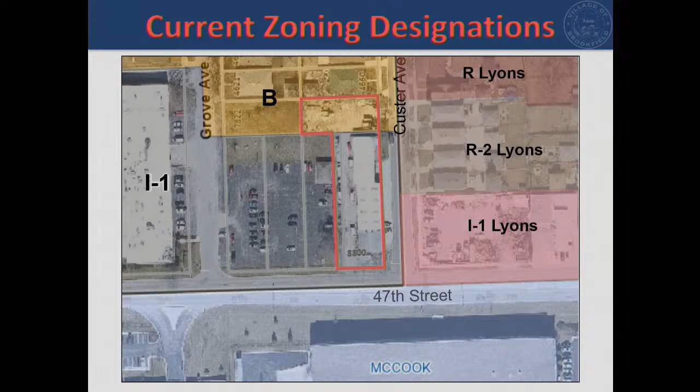So on February 23rd, the majority of the commissioners determined that the map amendment request met the standards for this type of request and issued a 4-2 vote in favor of recommending the request. Likewise, at that same public hearing, the majority of the Planning and Zoning Commission determined that the special use request met the standards of review for this type of request and voted 5-1 in favor of recommending, with the conditions shown here. That concludes my report.

Thank you, Kate. Do the board members have any questions or comments related to this application? Kate, can you talk a little bit about, I understand the B to the I1, but for the outdoor storage, if we approve that, and this is sold to another like business, I understand that. What if it's sold to something different, a different use? Wouldn't you have to get the approval for outdoor storage for that particular use?

So that is an option to approach it that way, because outdoor storage is an accessory use, it is not the primary use, such as the plumbing business. I believe that the special use permit could be issued related to the property, or it could be issued in such a way that it would not authorize a different type of use. So if we approve the outdoor storage, that's outdoor storage on that particular PIN number, whatever the use is.

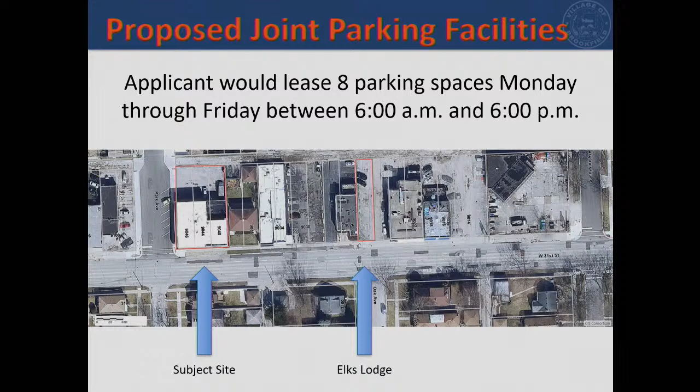On February 23rd, the Planning and Zoning Commission deliberated, asked questions, and considered the standards of review for both special use permits and variances. They did not move to recommend approval of any of the 3 requests. I will mention that the petitioner is here this evening and does wish to make a presentation as well.

Sure, I'll leave it up to the board. Do you want to hear the presentation first and then open it up to questions from the board? Okay, sure. So if the applicant would like to please come up to the microphone and give us your name for the record, and then you may address the board.

Hello, my name is Pavel Chalderna. Thank you very much for allowing me to present this presentation. We are proposing a daycare. The proposed parking configuration, designed by a licensed architect, provides 7 parking spaces, including 1 ADA space. A traffic study has been done, and it shows less than 1% increase in traffic caused by an operation of this size. The parking lot includes a dedicated drop-off and pickup area to ensure safety for kids.

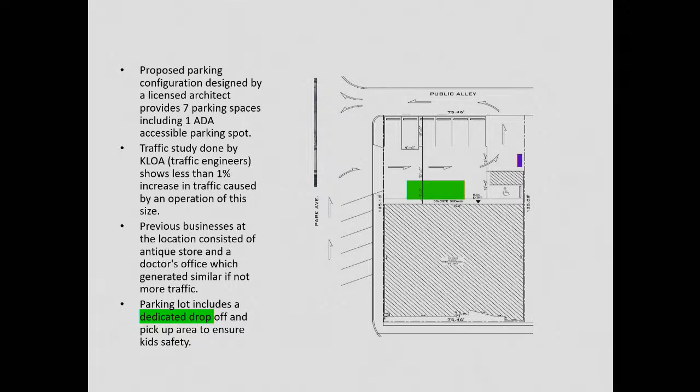The site has been visited by DCFS twice now. Both licensing representatives, Ms. Jasmine and Ms. Shantil Sanders, determined that the location is suitable for daycare and meets all of their necessary requirements. Ms. Sanders, who we've been working with, evaluated nearby Candy Cane Park and also found it suitable and within walking distance from the site. She gave us an idea, and we are planning, if we get approved, to have an indoor playground for the kids.

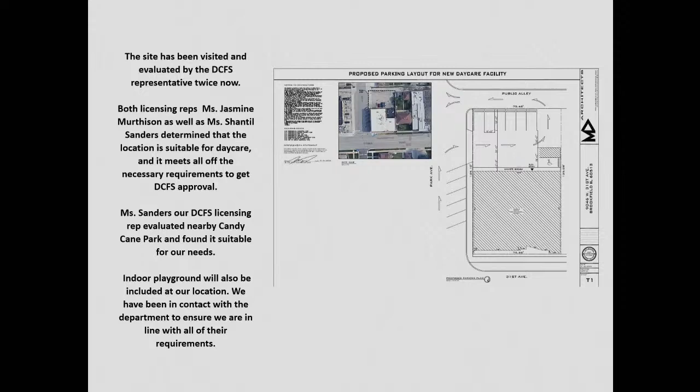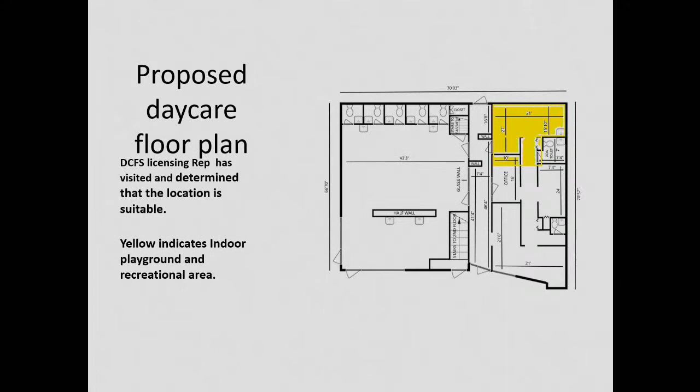Once again, the DCFS determined the location is suitable, and the highlighted yellow spot shows where the indoor playground will be.

The previous concerns were mainly raised about public parking spaces next to the building. Those parking spaces have nothing to do with our application, and we've gone over and over on traffic—we did a traffic study, and it does not show an issue. It shows that the traffic will be less than a 1% increase. Before we decided to open a daycare, we consulted with an architect and traffic engineers. We ourselves also have experience with a daycare. We spent endless hours researching, and we know there's a need for a quality daycare in the area, and we do want to provide one.

We went above and beyond to make everyone happy, and found a resolution to basically every problem that was brought our way. We are willing to reduce the number of kids if that's necessary. Thank you very much.

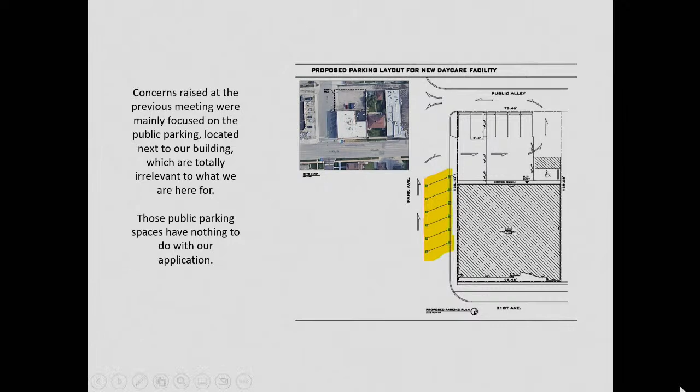Does the board have any questions for the applicant at this time? I just thought I'd keep you up here in case they have questions. We'll have questions for staff, or you can direct questions to staff as well.

One question at this point: what is the plan for the alley? If it's one-way westbound, is it all going that way, or is this actually going against the traffic of the alley? The traffic is shown on that diagram to go westbound. Okay, and that's the way the whole alley is? No. Right, that's what I'm asking. So at this time, there's no code reference that staff was able to locate indicating that the direction of that alley goes in two directions, although that did come up at the public hearing.

But right now, it is an eastbound alley. There is signage of both sorts posted at that alley. It's hard for me to say when that occurred. Okay, but right now, if we were to drive out there, we would assume it is an eastbound alley, correct? At a portion of it, in the middle, yes. And this part being proposed would actually go counter to that.

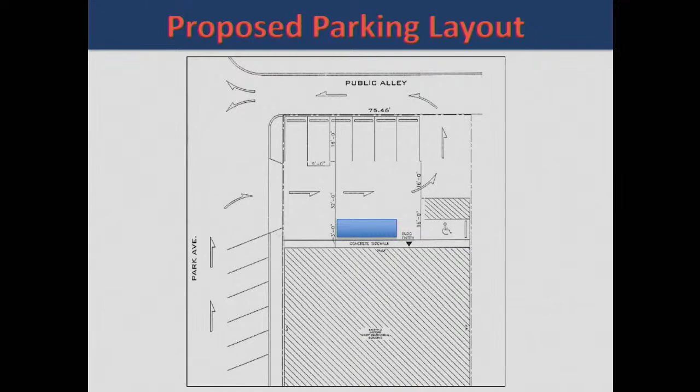President Garvey, in the memo it says 13 are required for the daycare, so it's the residents upstairs plus the daycare amount, totaling 13. And once again, we are willing to reduce the number of kids to actually need even less parking. Okay, I was just trying to clarify the application and the request for my own thoughts.

Other questions or comments from the board? Are we allowed to put a condition on this that might specify who parks where? That this is resident parking behind the building and employee parking at the Elks Lodge? That is an opportunity of a special use permit, yes.

Thank you. I'd ask the village attorney to weigh in, because if the tenants upstairs aren't impacted by this application, and depending on what their leases say for these spots, I don't think this use could have an impact on a lease that a residential person would have over those parking spots. Correct me if I'm wrong, Tom. No, you characterized it correctly. I'm not familiar with where the residential spots are with this property, but the special use would not impact the residential use. This zoning action could not impact an existing legal lease those tenants may have. I have no idea what those leases say about these parking spaces.

It wouldn't necessarily impact the lease, but could we specify as a condition that the parking at the Elks Lodge and the shared parking is for employees and for the daycare? That would be between the lease or agreement the Elks Lodge would have with the applicant or the business. But if it's a condition of the special use? Correct, that is something that could be done.

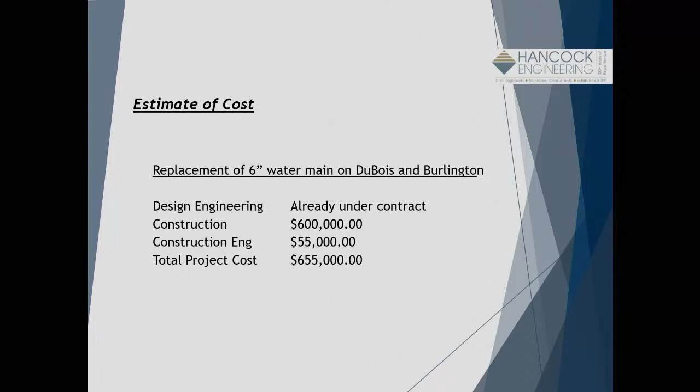We have a second section of water main replacement, and I'd like to give a little background. This is the intersection of Prairie, Grand, and Brookfield Avenue, and you may be aware we hired a contractor last December to come out and do a repair. This actually started back in 2018 when the 6-inch water main that runs north-south beneath the tracks had a break, and it was beneath the tracks where we couldn't excavate and repair.

So at the time, on the south side of the tracks, the water main was cut and capped -- in other words, there was no more feed to the 6-inch main toward the north side. On the north side of the tracks, we ended up closing it; it took 7 valves being closed on the north side to prevent water from flowing through that water main beneath the tracks.

That effectively stopped the leak, but we had 7 valves closed on the north side of the tracks, which left some one-way feeds. In the late fall of '22, a business development on Grand wasn't getting the fire flow readings they desired, and we felt the readings should be higher if this was a loop system. It was determined there was just a one-way feed, so we went out to try to cut and cap that 6-inch water main on the north side of the tracks.

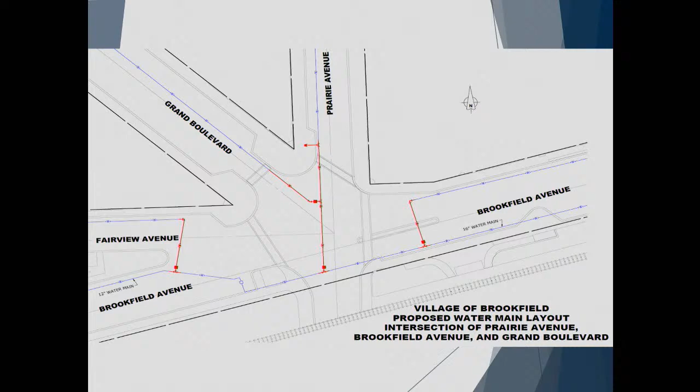That connection is currently out in the middle of the intersection as well. We're proposing to make a tap east of the intersection and connect to that 6-inch water main that runs east to Forest Avenue. Lastly, the middle connection, we're proposing to leave this connection because that's the 6-inch that runs north on Prairie. We'd tap into it at the south end to the 16-inch and then run new 8-inch pipe north approximately to where the existing fire hydrant is on Prairie Avenue. As part of that connection, we would also tie in the water main on Grand. So even though some of that main would still be out in the intersection, it would be new ductile iron pipe water main. Again, we estimate you'll get 50 years or more of service without any need to go out there and repair it.

We did prepare an estimate of costs. The estimate for construction and engineering is $606,000. We're suggesting that we go out to bid on both of these projects this year and try to get construction done on both.

Rough time frame, if the board does choose to move forward with this: if we're authorized on March 27th, we'd have design during April and May, open bids in June, award in July, and then construction could take place sometime between August and October.

I did talk to Emily. I know we have the bike event. That was in June? Am I remembering? July. We would not be ready for construction prior to July. I know there are some other events out there.

I should mention the work up on Ogden, on Brookfield Avenue, Prairie, and Grand. That's about a 4-week shutdown of the tracks, and it would include a full detour for traffic during that time. Since we'll have traffic detoured as part of the restoration, rather than patching all of it, the area in the intersection, internal to the brick paver sidewalks and running up towards the railroad tracks, we would resurface that entire area instead of just patching it, so we wouldn't have to come back there for 20 years with a resurfacing project.

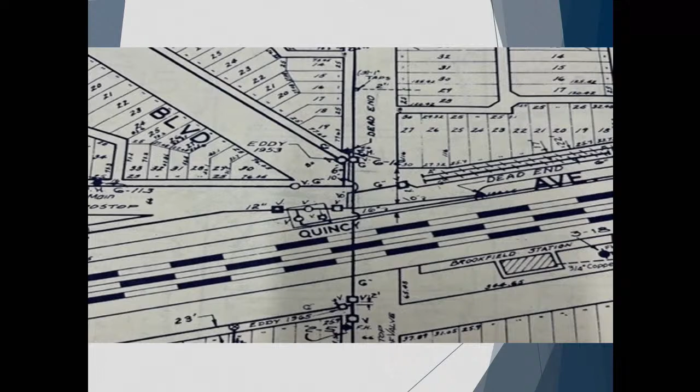When we also did that hydraulic study, the 12-inch is what we were looking at installing on DuBois. We actually had considered augering it under the tracks to a 12-inch on Southview, which is quite an expense. Since that time, a few years ago, there was a proposed development that came in, and that might be the 80 unit you're talking about, and they indicated that they were going to sprinkle it, and B&F Technical came in with a much lower fire flow demand, which would allow that 12-inch to certainly feed it. Matter of fact, an 8-inch might even be sufficient. If this is approved, we would go ahead and work with B&F Technical on what we think the maximum development for that site is and size the water main accordingly.

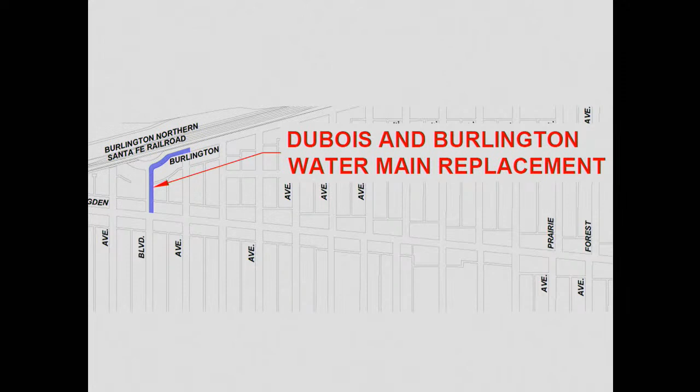And then what about in terms, that's a collector route. We're set to be resurfacing that, 24? Or 24, yes. So does that play into, is this under the walk still? Yes, the new water main we anticipate would go under the east sidewalk on DuBois and under the south sidewalk. And part of that is we're actually reconstructing that section of DuBois, digging out the base and all of the existing pavement. Typically, we like to consider moving the mains, replacing those mains as part of a reconstruct. We're suggesting we get it done ahead of time, not part of that federally funded project.

Okay, thanks. How many residential houses are right there on DuBois at that section? And do we know if they're running lead? I do not at this point, and I don't have an exact number. I want to say on DuBois there could be a half dozen, and I think there's 3-4 more on the south side of Burlington.

Right, so we'll determine whether those are, and I just haven't, at this preliminary stage, contacted PW to find out if those are lead services. If we replace the main, the lead services will be replaced all the way into the house, and if they are copper services, we still put a new copper service from the main to the B box and then reconnect to their copper service. And then for the ones that we have to replace, if the line has to be increased in size, they have to get a new meter. Are we responsible for that meter?